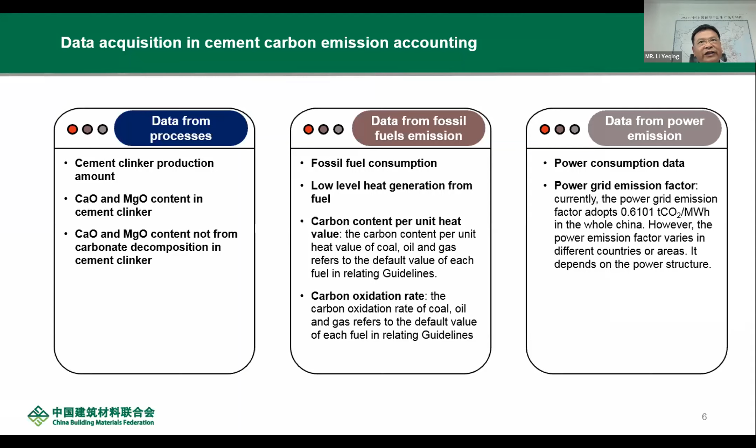Let's look at this data of carbon emissions in the whole cement production process. We take this NSP kiln as an example, which is the typical and advanced pre-calciner kiln system in China. From this system, we can see the carbon emissions per ton clinker is around 860 kilogram per ton clinker, or 850 clinker is the better practice.

As to emission source, the carbonate decomposition accounts for 61 to 63%, about 525 to 545 kilogram per ton clinker. Emissions from this aspect depend on the clinker component, whether the alite or C3S content is higher or lower.

Emissions from the fuel account for about 35%. This means about 300 to 315 kilogram per ton clinker. The third source is purchased electric power, which accounts for a small proportion, 2 to 2.5%, about 16 to 21 kilogram per ton clinker. This is about the clinker aspect.

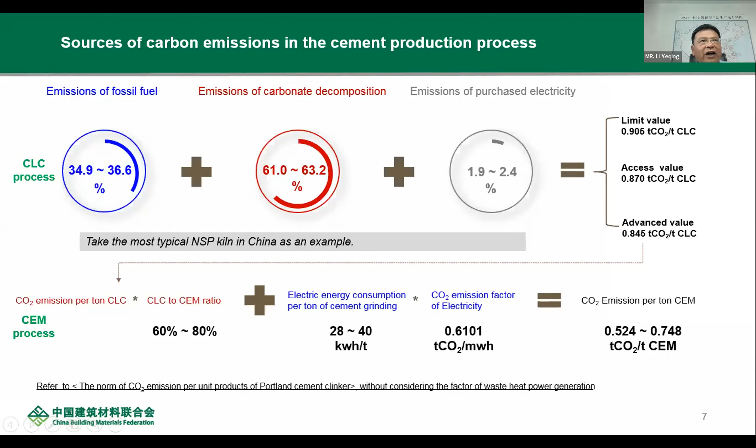The power emissions factor used here is 0.61. Therefore, the carbon emissions of the whole cement process is around 524 to 748 kilogram per ton cement.

The mentioned data is based on the NSP kiln. In other countries or areas, there is a different process. So what is the difference? The difference is mainly the heat consumption, which we call the fuel emissions. Look at this table.

Take the wet process, for example: the heat consumption is 1,300 to 1,500 kilocalorie. The process carbon emissions are similar, the average process is similar. The impact of the power is also not so big, but the fuel emission reaches to 600 kilogram. The total clinker emissions are close to 1,100 kilogram per ton clinker.

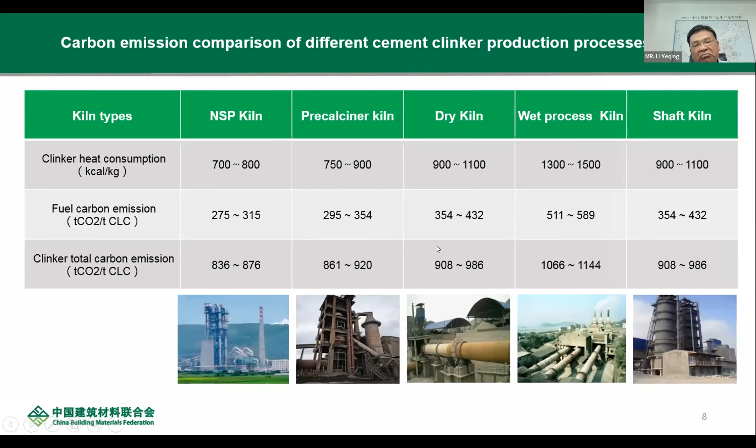This is higher than a lot of the NSP lines. The heat consumption of the shaft kiln is 900 to 1,100 kilocalorie, and the clinker emissions are close to 1,000 kilogram.

This is the part where I introduce the policy and emission reduction of the China cement industry. As we know, in September of 2020, President Xi Jinping announced at the 75th session of the United Nations General Assembly that China will seek to achieve carbon emissions peak in 2030 and carbon neutrality in 2060. In the following more than one year's time, President Xi Jinping reiterated this commitment at nearly 10 big international occasions. This is China's sense of responsibility to advance building a human community with a shared future and fulfill the requirement to achieve sustainable development.

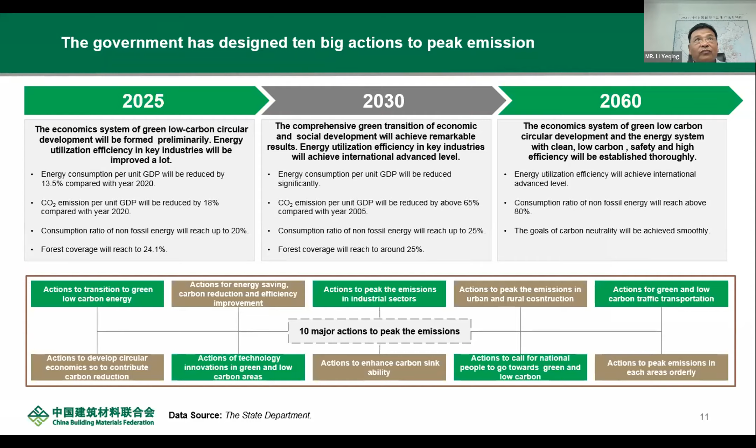This page shows the government's design for the bigger picture. When we come to 2060, the energy utilization efficiency will achieve an international advanced level. Consumption ratio of non-fossil energy will reach above 80%, and carbon neutrality will be achieved.

The 10 big actions include clean green energy, circular economy, energy saving, and carbon reduction. Here we can look at the key proposals for high energy consumption and high carbon emissions industries, such as coal, electricity, steel, aluminum, cement, and petrochemical, to achieve technical reconstruction and upgrades, as well as centralized control of capacity.

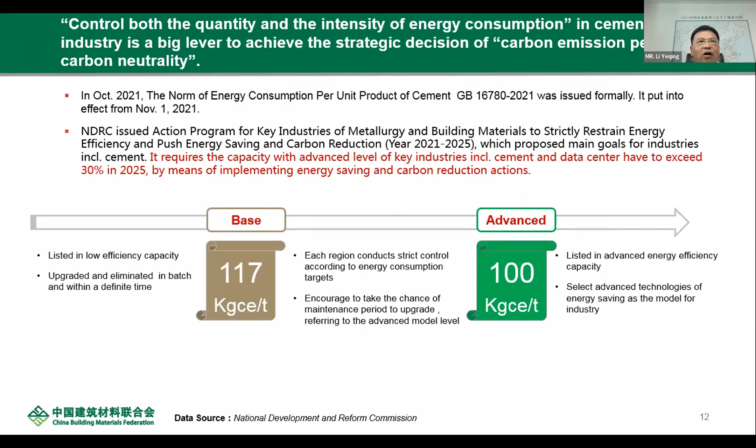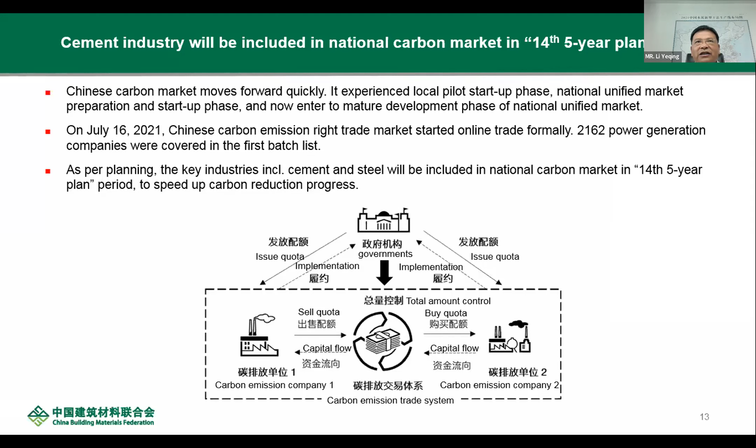For this third part, I want to introduce some practices of the Chinese cement industry to reduce carbon.

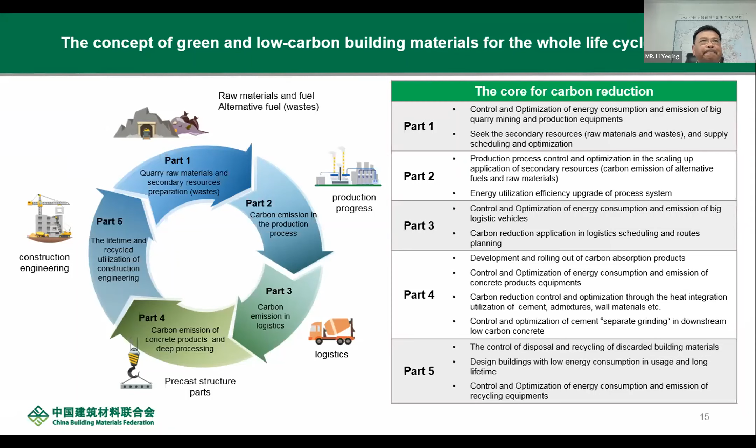Looking at the reduction potential, we know the reduction potential from the process is low, but the impact from process emissions is high, so we have to rely on external carbon sink technology to balance this.

Our real priority is on the fuel and electricity aspects. Emission reduction from the fuel aspect has the highest potential as well as high impact. The electricity aspect also has high potential, but the impact is relatively low.

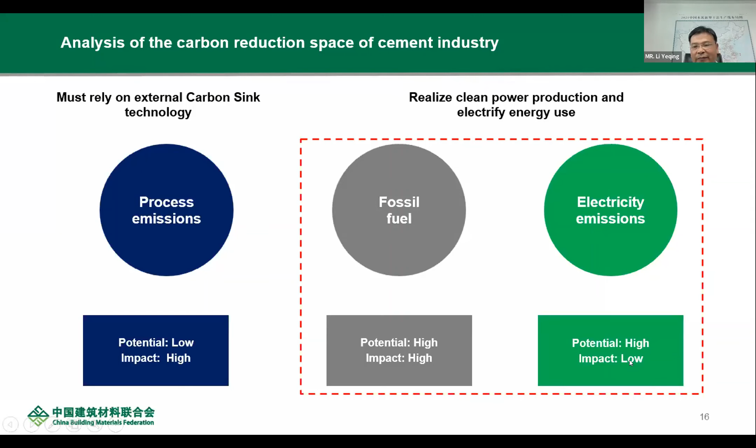This paragraph is about a typical NSP process. The previous page already showed some of the carbon emissions in the process of cement production. Now let's analyze the reduction potential of each step in the production process in more detail.

The second is alternative raw material. We call this potential relatively high, using some non-calcium-carbonate type industrial waste as we already mentioned. However, since the availability of industrial waste is limited, the total reduction potential is not so high.

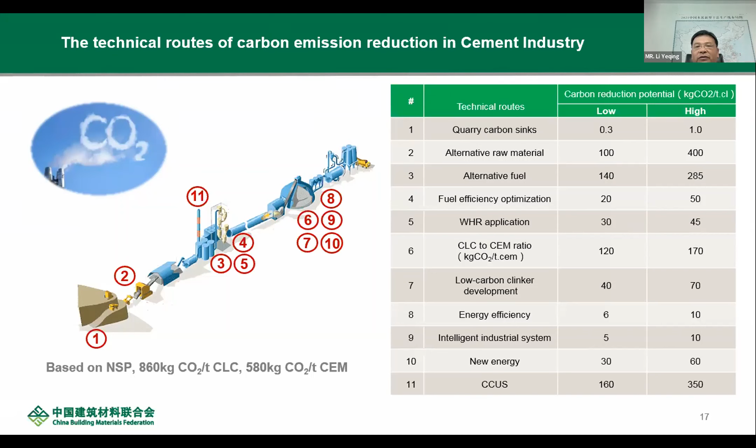The final one, number 11, is CCUS. As you know, for the cement industry, it's not possible to use any technology to reduce carbon by itself. We need CCUS, and the CCUS can save the last part, 160 to 350 kilograms. This part is very difficult for our industry.

Just now we mentioned the reduction potential from the quarry and mining raw material is not too high, and the overall emission is not so big. It's about below one kilogram reduction potential, which includes rehabilitation around the quarry. The production is a big operation, so you can look at this picture.

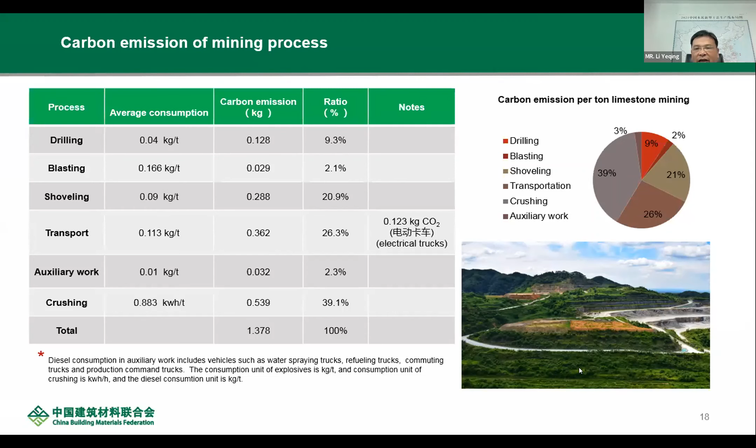For this paragraph, as you know, they are mainly the grinding system for the raw meal production, and the traditional one is the ball mill system. Currently more and more use vertical roller mills, just like this one, and the roller press.

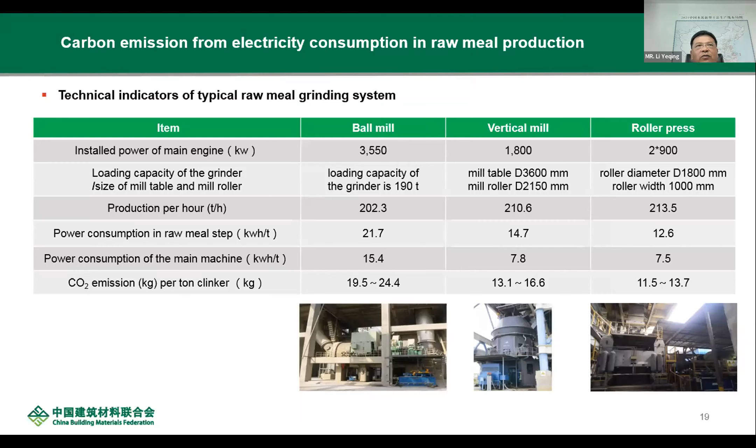There we have data about the consumption of different mill systems, for the same production quantity. We can compare this table. We can see the emissions of the ball mill is about 20 kilograms, the emissions of the vertical roller mill is 15, and the emissions of the roller press is 13. Based on this data, we can prefer to use vertical roller mills and roller press systems. This is what we previously mentioned: emission reduction through energy saving equipment.

This is the biggest contribution and the most important step in clinker production, namely the heat work system and alternative fuels. Here we have actual data about the emissions reduction amount by Chinese cement kilns using alternative fuels.

On one hand, we can reduce the use of fossil fuel to reduce carbon emissions. On the other hand, this can mitigate the land resource tension caused by waste landfill, as well as save the investment for building waste disposal infrastructure, and reduce the CO2 emissions from disposing waste. Besides, cement kiln co-processing can also reduce methane emissions from landfill. 60% of the exhaust gas from landfill is methane, which has a global warming potential 21 times higher than carbon dioxide. Compared with waste power generation,

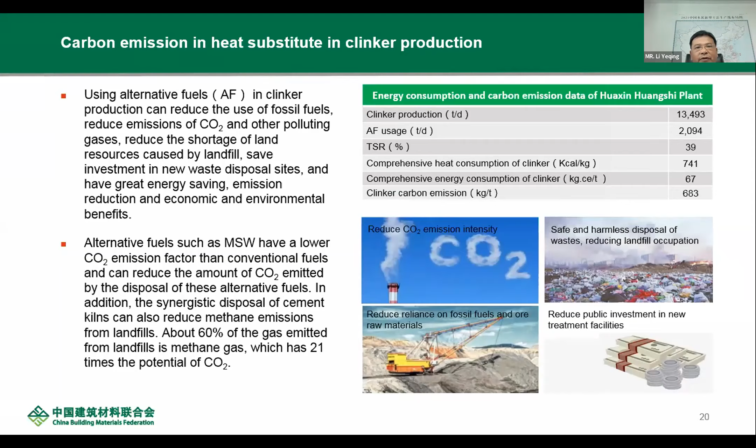In China, alternative fuels are covered into 6 types, including municipal solid waste, municipal sludge, general industry waste, industry hazardous waste, construction demolished waste, water floating objects, and agriculture waste as the 6th part.

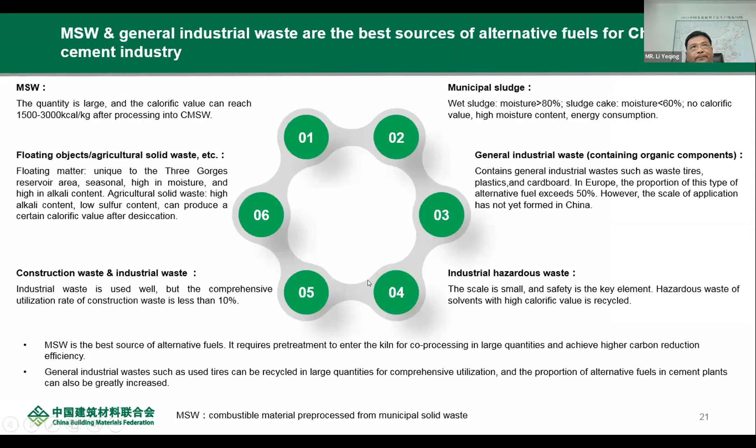Currently, alternative fuel is more and more used in China. In Huaxin Cement, the biggest alternative fuel user, the ratio achieved 39%. However, the national average ratio is not so high, only 2%. The highest alternative fuel ratio is from developed countries in Europe and Northwest Europe, some of which can achieve 70%. This is an important direction for China cement companies to work toward.

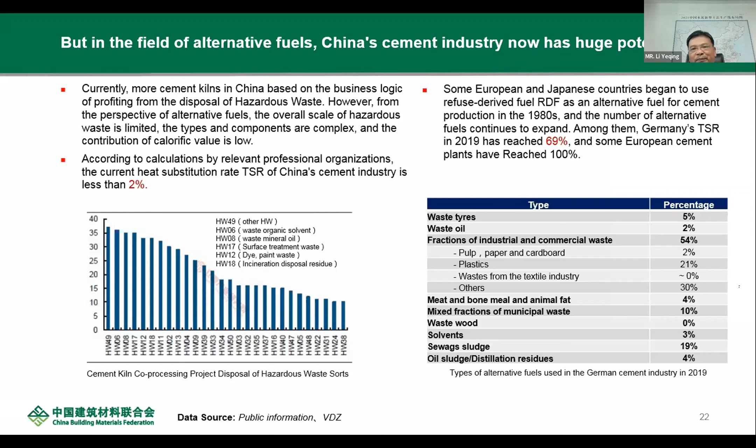Let's see the aspect of improving clinker heat efficiency. As introduced previously, the comprehensive heat consumption of a typical modern NSP is about 740 kilocalories, and carbon emissions can be reduced if we simply use this system. However, we can achieve more from the full system, including the steam generated from the clean exhaust gas. We use this steam to generate power, which can bring some heat efficiency improvement. If we can use this steam to manufacture building material products, the heat efficiency can be improved to a much greater extent.

Heat efficiency improvement means reduction of the system's carbon emissions. Huaxin cement is testing a new technology which transforms current concrete bricks using CO2 and exhaust gas from the cement kiln. After testing, the average compressive stress of the bricks can reach about 15 megapascals, which fully satisfies the relevant requirements. On the other hand, each brick can absorb 30 grams of CO2, which efficiently reduces carbon emissions in the future.

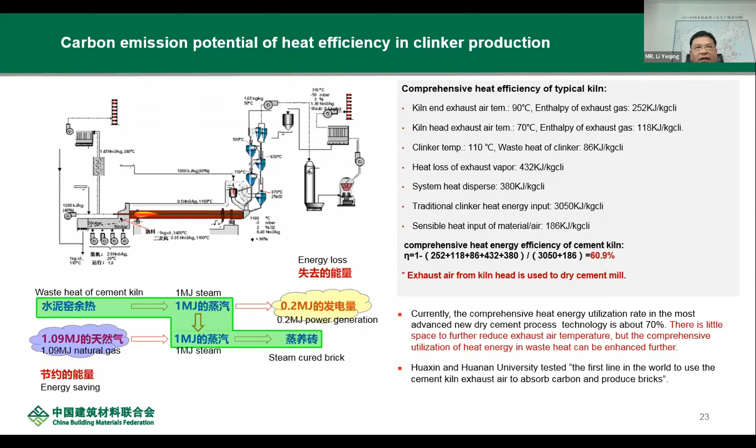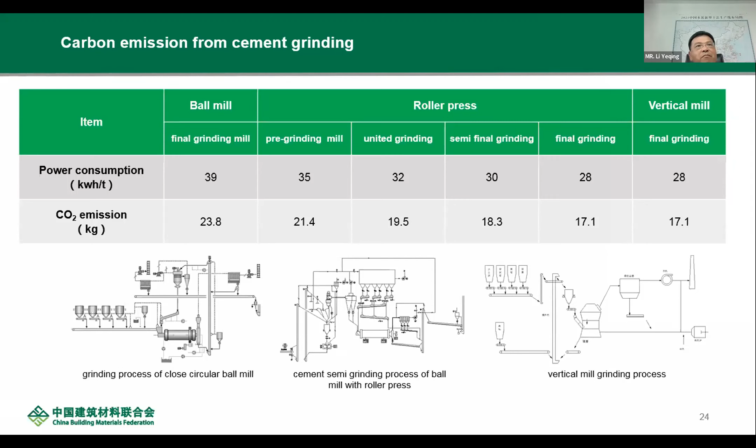For the cement grinding system, the power consumption for the traditional ball mill is 39 kilowatt hours, and carbon emissions are 24. Now we use roller press plus ball mill systems, including pre-grinding and united grinding, and semi-final grinding systems. The consumption can be reduced from 23 to 18. We also have the vertical roller press mill as a separate final grinding system, where carbon emissions are very low, only 17. Overall, whether ball mill or vertical roller mill system, the difference in carbon emissions is only 6 to 7 kilograms. Considering the total cement carbon emissions amount, the difference is very limited. So the biggest impact is the fuel.

There are also some emissions from concrete and aggregates. From this table, we can see the carbon emissions from concrete with different grades from C15 to C50, including carbon from cementitious material, gravels and aggregates, and additives. It's about 105 to 300 finally. The key to achieving carbon reduction of concrete is to reduce cement carbon emissions and use less cementitious material.

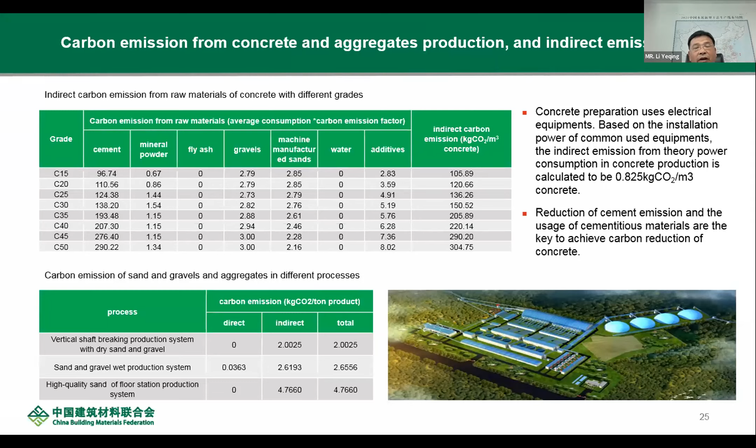Let's see the last page, comparing the comprehensive energy consumption reduction potential for kiln lines with different capacities. Currently there are more than 1,600 cement lines in China, the biggest with capacity of 14,000 tons per day, and the smallest with capacity of just 1,000 tons per day. We selected typical capacity lines of 5,000 tons per day and 2,500 tons per day. The calculation is based on the general field program and energy consumption. The 5,000 ton line is lower for sure, but if we use a higher weight of alternative fuel, the AF ratio of the smaller capacity line is higher, because the same AF amount can satisfy the smaller capacity line better compared with the biggest capacity line. Finally, speaking, the comprehensive energy consumption is similar, but the line with smaller capacity can be reduced much more easily. This is the result we got from the scientific calculation.

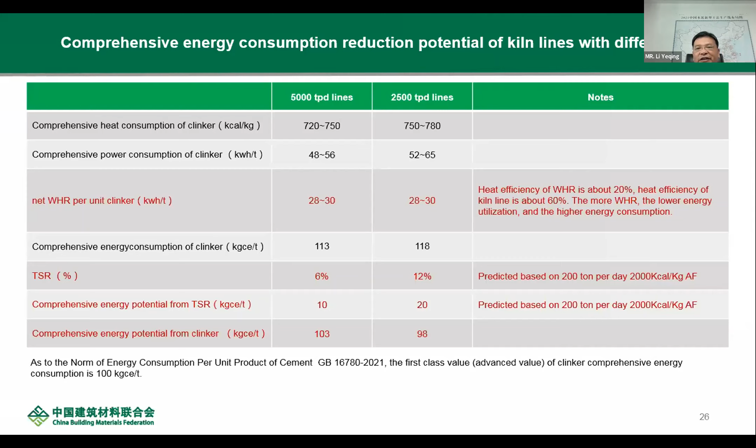This is my presentation. Here we show China's cement industry policy and practice for low carbon transitions. That is all for my introduction. If you have any questions, I'm very happy to answer them. Thank you very much, thanks for your attention.